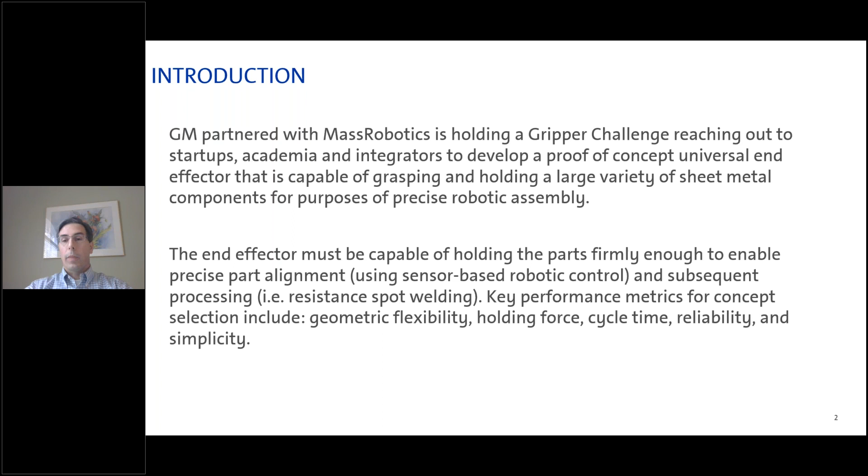So we're trying to develop a proof of concept universal end effector. The larger the variety of components that the end effector can handle, the better. It must be capable of holding parts firmly enough to enable precise part positioning and alignment, as well as processing—which in our body shops typically means resistance spot welding, but can also mean placement of adhesives or other sealant materials. The key metrics we're looking for include flexibility, holding force, cycle time, the time it takes to reconfigure the end effector, reliability, simplicity, and cost.

I want to show you—many of you are familiar with automotive manufacturing to a certain degree—but since I can't walk you through a plant, I wanted to show you some videos virtually that give you a flavor of what it's like in a body shop environment. Hopefully this will work.

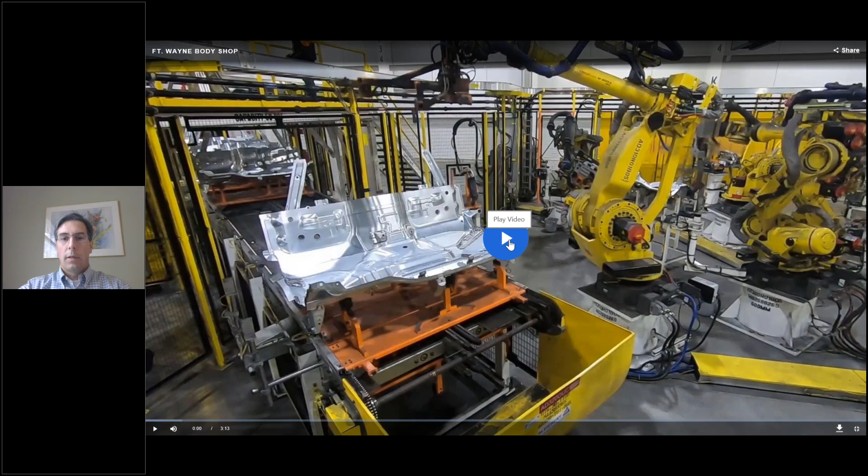These are videos that are publicly available on our media site. Russell or Fady, let me know if there's any trouble seeing this video image. I'm going to walk you through here. I can see the video, and I hope the rest of the participants can see it too. If you have any problem, just send us a message in the chat box.

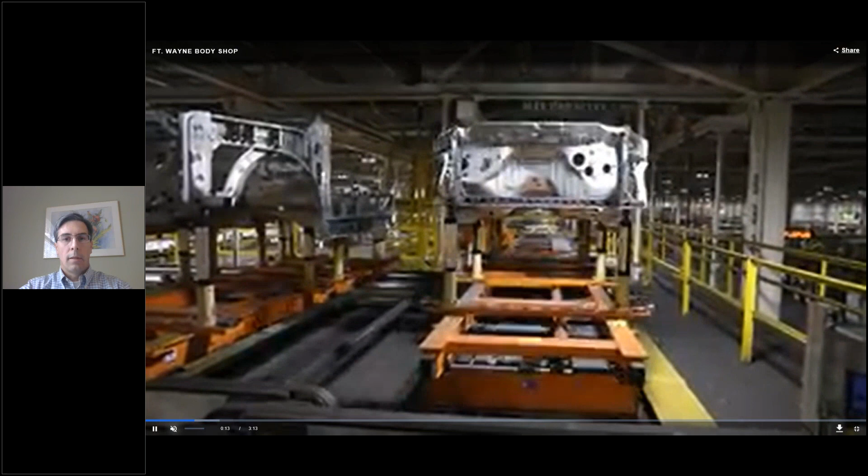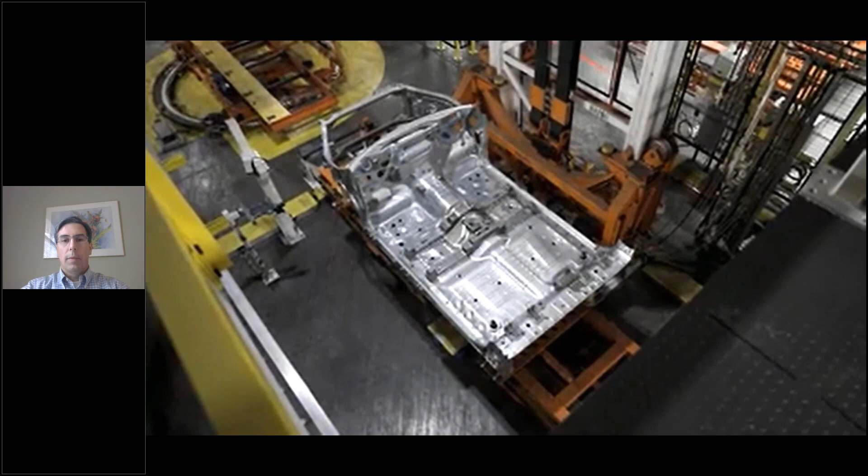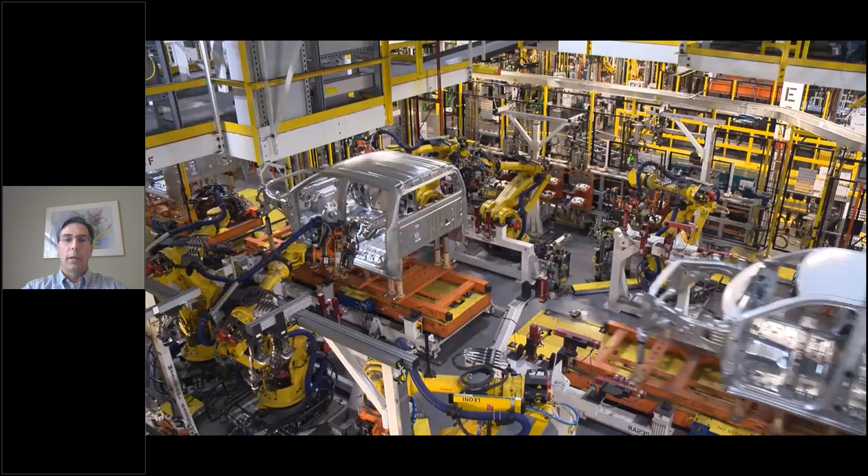So this is what it looks like in one of our body shops. This is for our Fort Wayne truck assembly plant, and this is where we're producing the sheet metal body structure of the truck. You can see it in a certain stage of buildup—it's not complete at this stage. This would be a sub-assembly cell, and you can see the sparks flying—that's expulsion from resistance spot welding. Parts are being held together in fixtures while they're being welded with resistance spot welding, and you can see various robots working to either do welding or move parts around to different positions, placing them into fixtures or holding them against the vehicle.

You can see that this is a harsher environment to be in than your typical warehousing operation, especially since hot metal can be destructive to certain materials, especially materials that are flammable.

If I back up quickly here, you can see a typical end effector in orange at the end of this yellow FANUC robot that's holding a larger sheet metal component. That's typically how we build them—it's dedicated to a single style, and it's a steel structure made out of steel tube.

When we're done producing this particular style of component, we'll need to throw away this end effector and buy a new one. That means designing a new one, building a new one, trying it out, and making sure that it works. This is something we do for every single robot end effector, and times hundreds of robots in a body shop in a plant. We would like to be able to do that with a flexible solution so that we can reuse our capital over a larger number of parts.

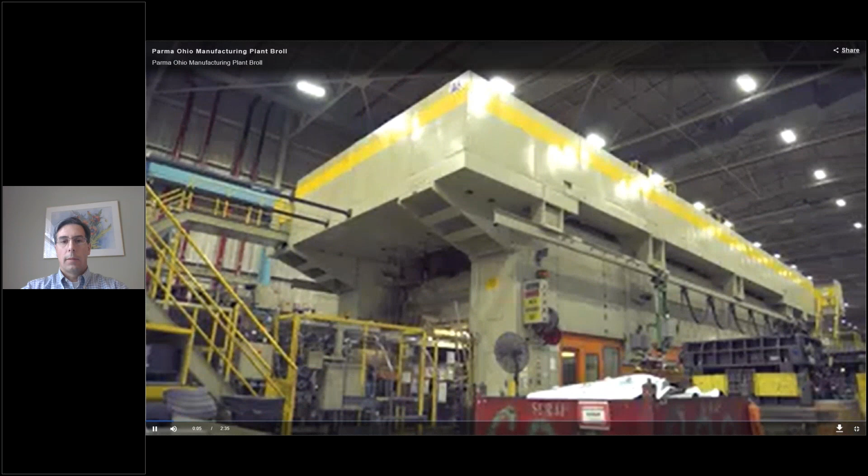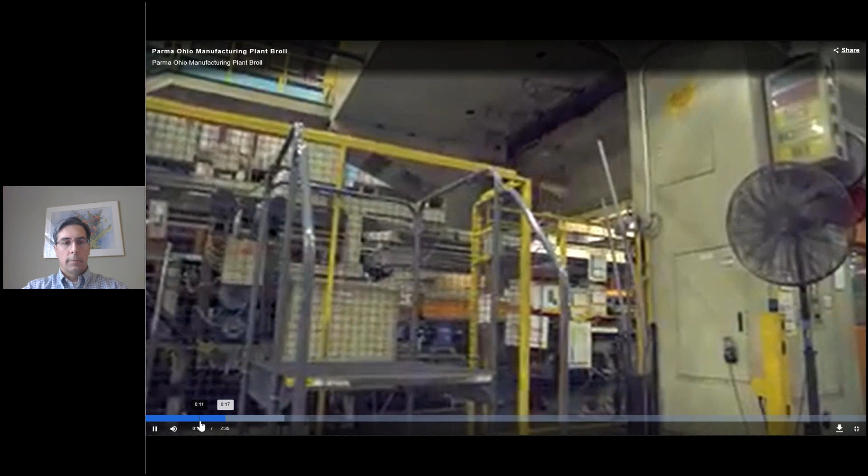You can think that the end effector will see three different types of loads. One is the part in a static condition, just holding the part. The other is dynamic, when you're moving the part from point A to point B. And the third is where at point B you might be pressing the parts against each other or against the fixture, applying a certain force. The worst case scenario for this challenge out of those three would be 25 pounds, as you mentioned, Russell.

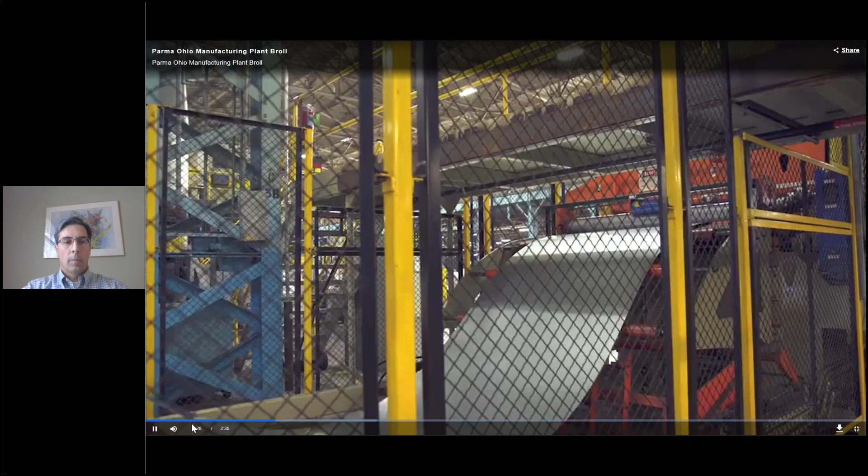All right, so we have another question. I know this is probably a tough one, but broadly, what are the typical dimensions of the end effectors that you're looking for?

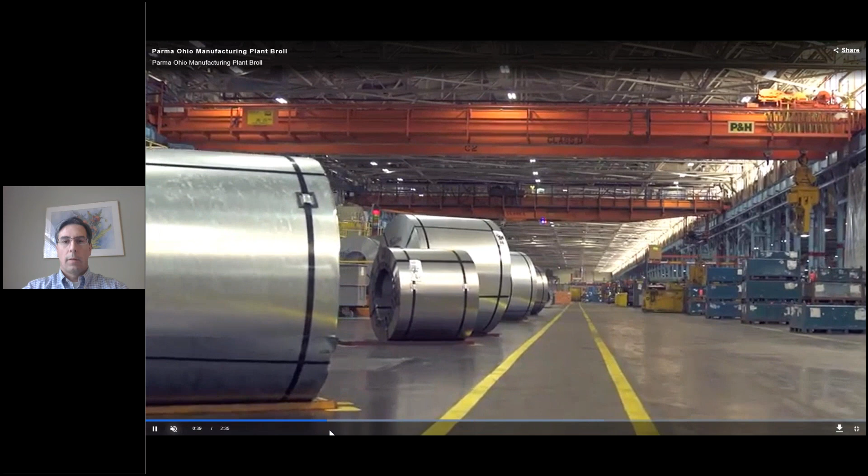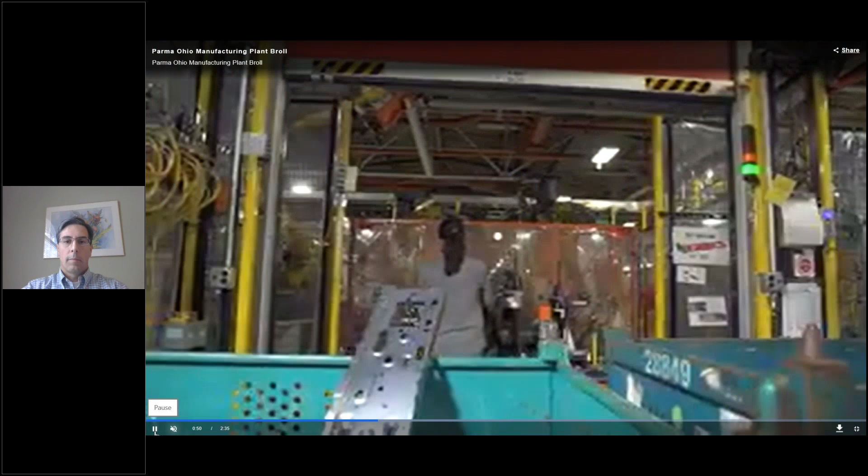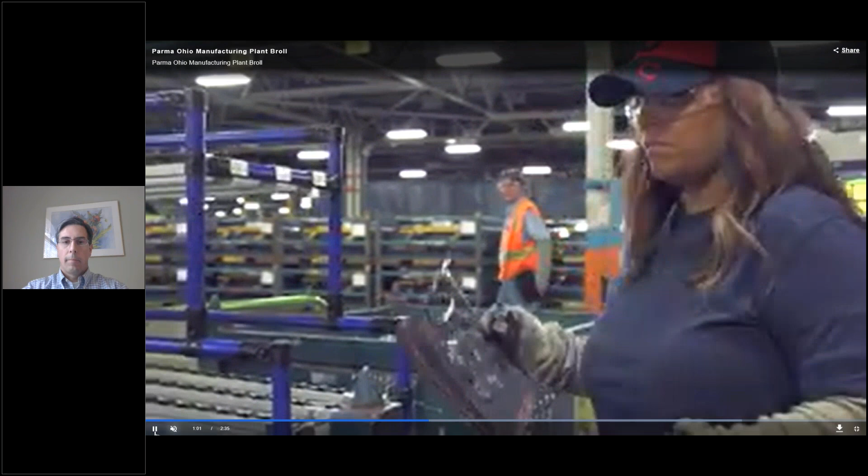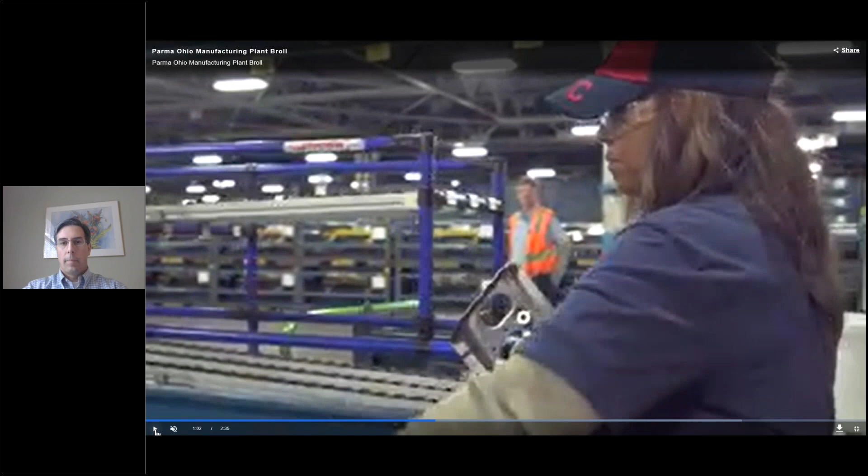So for the reference parts that we will be using, you can imagine that they all fit in a shoebox, or shoebox-sized brackets, if you wish. Some are smaller, kind of like the ones this lady is holding in her hand. So we don't necessarily want to constrain the solution for the size of the end effector. However, we will be evaluating simplicity, and that could be tied to the packaging of the solution. So I don't think that directly answers the question of whether we have a constraint on the size of the end effector.

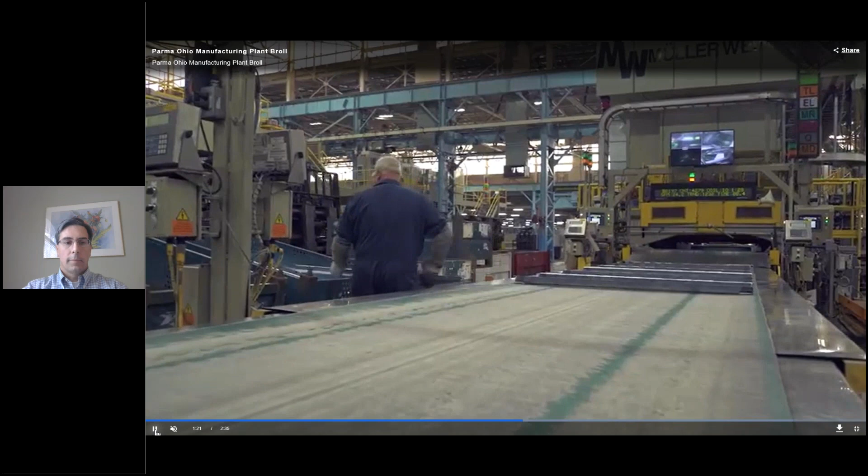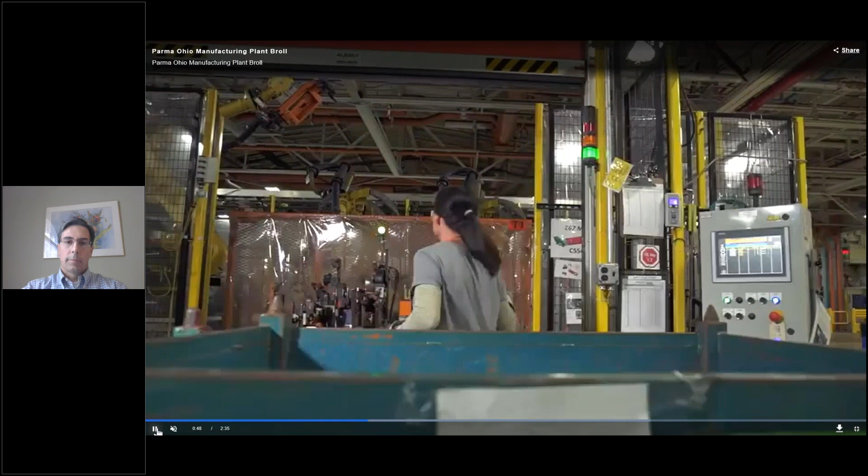So no, there's no limit, but we are considering that an end effector with better packaging and a leaner solution will get a higher score. As a reference, the parts that will be handled by the end effector can fit in a shoebox—they're about 30 to 35 centimeters long. Something on the order of the size of this part is our greatest interest right now.

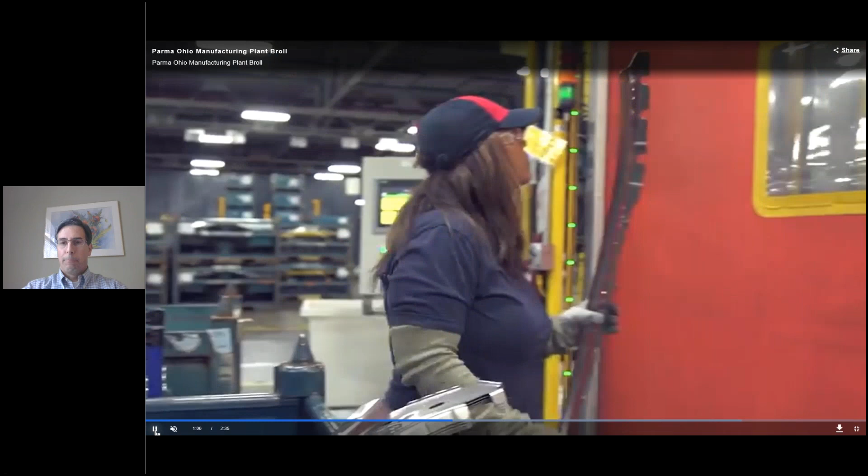We have, basically, a larger variety of these smaller components than we do the larger panels. Although if we had a solution that would handle the larger and smaller components at the same time, that would be great.

And one of my questions really quick too: are you guys interested in a scaled approach, in which maybe someone comes up with a gripper that is essentially the same design, but just a different scaling, bigger to small? Yeah, that's a great point, Russell.

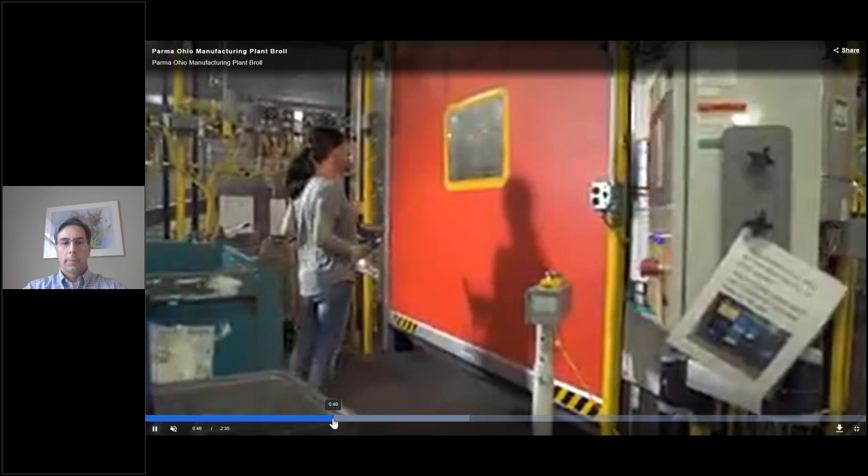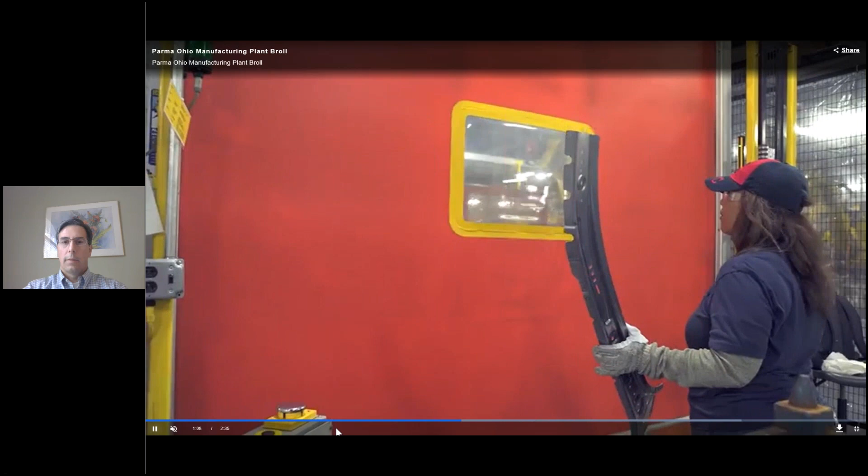And I think that the answer is yes. I think that more than the specific design for holding parts A, B, and C, what we would be evaluating is how the parts are being held, and can that same gripping strategy be scaled up or done at a larger scale. So if all it is, is take the same solution and put it on a bigger frame, and now you can handle bigger parts, that would definitely be an advantage.

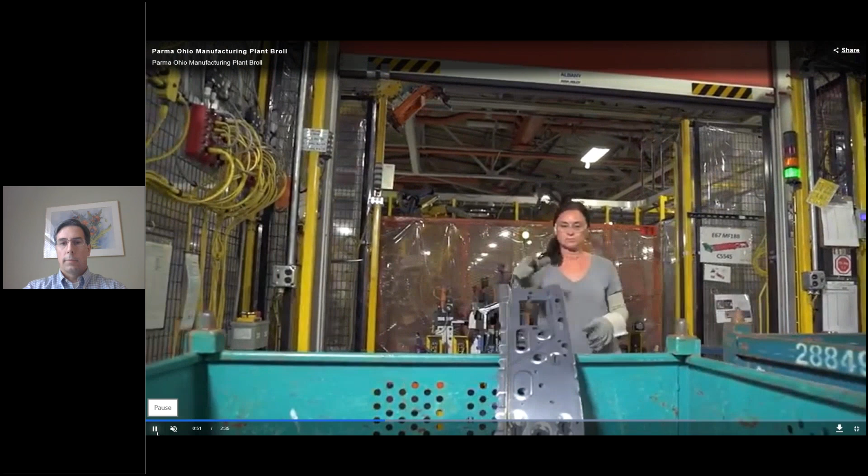Excellent, excellent. We have a few more questions too. We got a bunch. There's one: are there defined zero points for each part, and what are the tolerances for the parts?

So there are no, so the parts, I don't know if this answers the question in terms of zero for the parts. Usually in automotive applications, the typical holding strategy is a two-way and a four-way locating strategy, that is a pin and a slot. However, you could have a part with 2 pins, or you could have a part that's blind. So again, flexibility will dictate, and will be a major driver for how the parts are being held. So in that regard, there is no zero point on the parts that we have to maintain. We have to be able to assure that the parts don't move once held by the end effector. But the relative position of the part with respect to the end effector could change from design to design, from part to part, right? So I don't know if that answers the question.

Yeah. Okay, well maybe I could add to that a little bit, Miguel, as well. In general we do add features to our parts that help us locate parts into fixtures. Like you can see here, these parts are being placed onto a fixture, and they're typically being placed over some pins that go through some holes in the part to make sure the part is positioned properly. And then there are certain surfaces on the parts that we have details in the fixtures that touch against, to make sure that part is held in a certain orientation on a certain plane. So many of these parts will have these features in them.

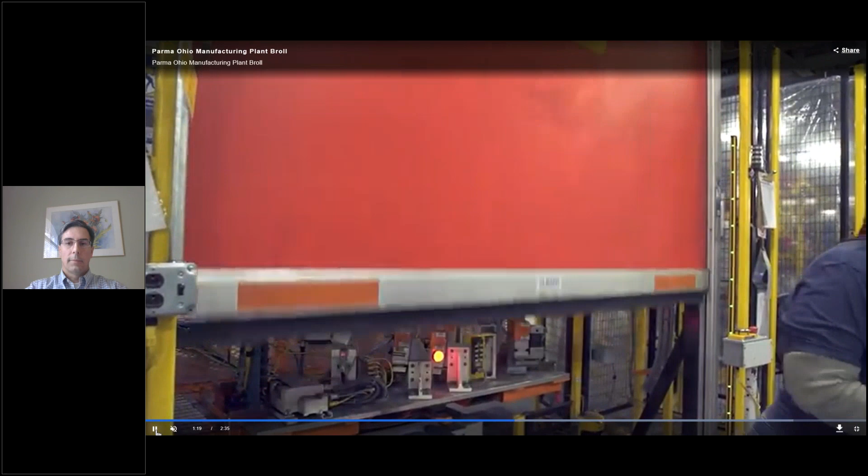So the parts will not have to be picked up from any bins. Right now, so correct me here, Pat, if I'm wrong, but the parts will be presented to the end effector on some sort of presentation nest that will put the part in, like, a single part in the right orientation. If a solution that can handle random bin picking of the part is presented, that would definitely be a plus. Yeah, I think that's probably a good way to answer it.

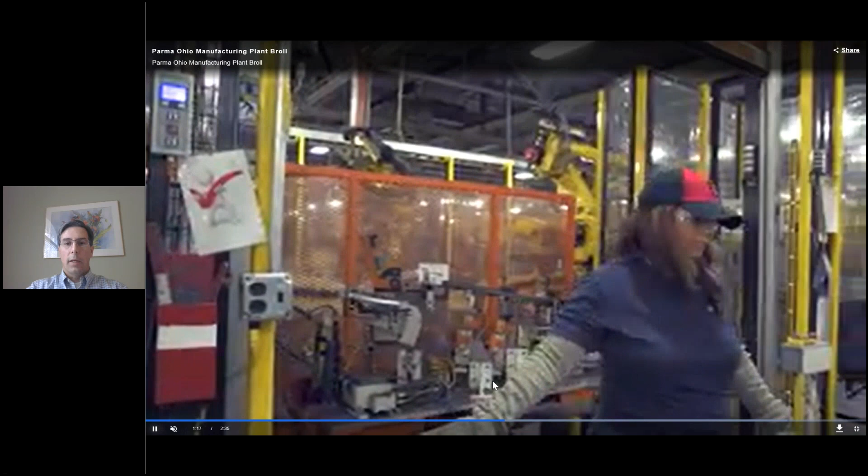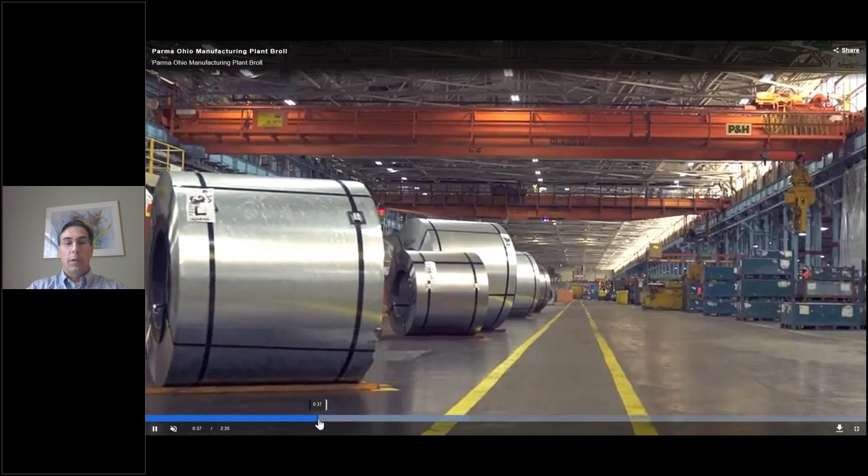To get to the robot, the parts need to come from these shipping containers usually, and so oftentimes, as you see here in the video, we have a person that transfers it from the shipping container to a fixture or to a position where a robot can pick from. But yeah, solutions that can do that picking from a container for us, and even if the part is in a randomized positioning in the container, those would definitely be ones that we would look at more favorably.

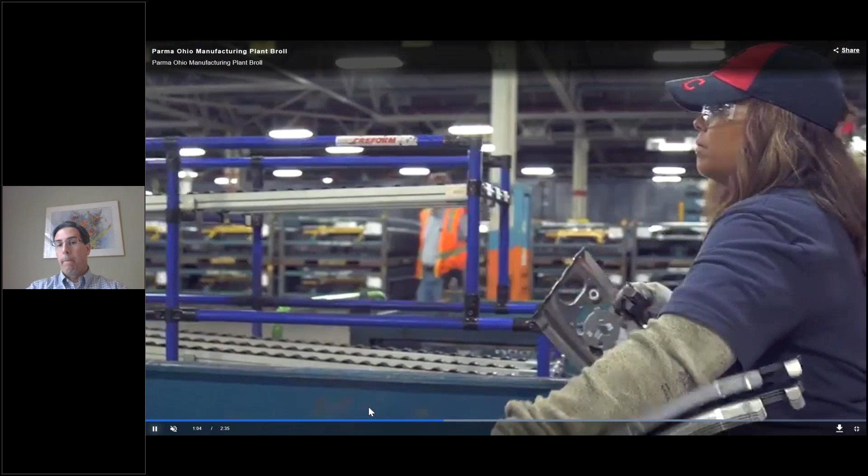Okay. And so I think there's another question. Just briefly, can you touch on why magnets are not preferred?

Well, maybe Miguel, you want to talk to that? I think, yeah, I don't know that we want to exclude magnets, but you can maybe talk to the specific challenges around them. Yeah, sure.

As I mentioned before, two main issues with magnets is that they could magnetize a part, and then the part would attract some of the particles, expulsions, for example, from the welding operation, which, as the vehicle goes to paint, get painted over.

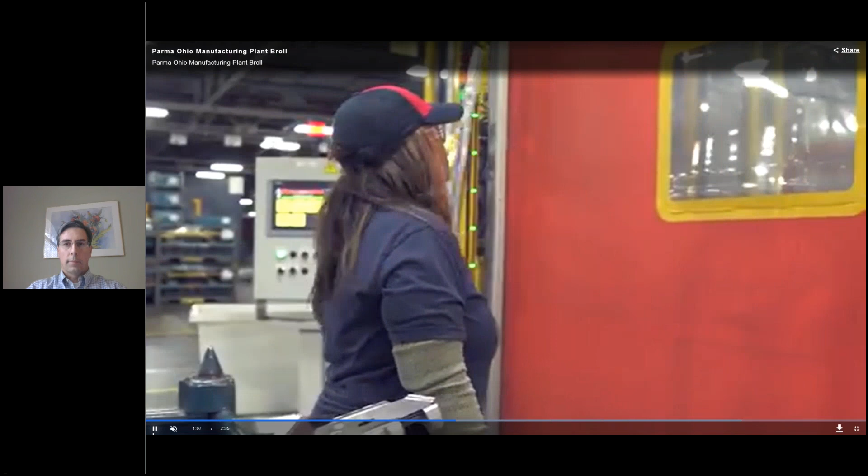So that is a quality defect if the part has a lot of expulsions embedded into them. Also, these comments come from experience, that the magnets end up, either the part attracts the particles or the magnet itself attracts the particles, and then it's possible that you start building up material on the magnet surface, and that affects the performance of the magnet, like the holding force, or they end up scratching the surface of the part.

So that is on the part side, and then the other aspect is flexibility. If a solution only relies on magnets, then the effector can only hold ferrous materials like steel, and with the current pursuit of lighter structures in vehicles, we're starting to use more and more aluminum, or even carbon fiber, but for the most part aluminum in our bodies. So not relying on magnets would be an additional point for flexibility.

Okay. So we got a bunch more questions we gotta run through.

Another question is, is there a minimum or maximum number of gripper elements? For example, one to three touch points working together?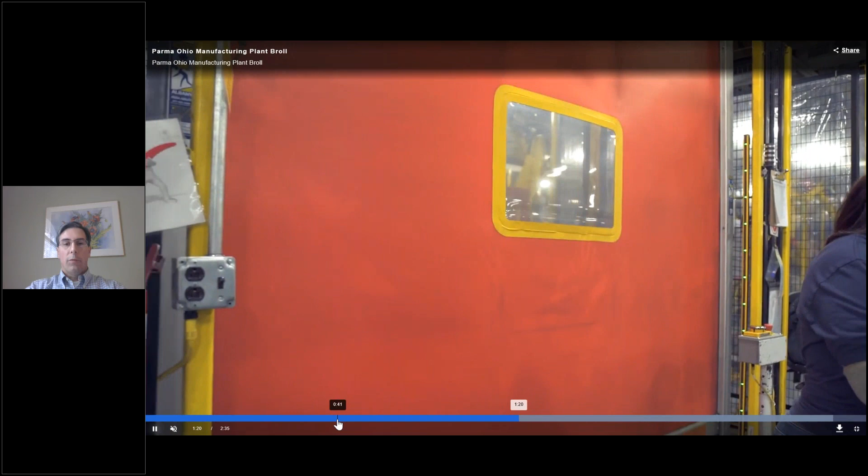I don't think we'd have a maximum or a minimum. We want to be able to constrain the part in space and do that in a flexible way. We want to avoid too much complexity because these have to run for years. We don't want them to break down easily. We want them to be easily maintained, and we don't want them to be too costly. Although if they're flexible and can be reused, we can afford maybe a little more cost than we could for a dedicated end effector.

Okay, let's see, we have another question. I'm not sure if this means... so they're asking about the IP protection level of the robots, so perhaps what level of security would need to be maintained working on this system.

IP protection of the robots. So, I'm not sure I understand the question completely. I think that the participant will maintain their IP in the end effector if it's their design. The rest of the components that we're using in our system for automation are off-the-shelf components. So whatever background IP, if you wish, that either GM or the participants bring to the table will be their IP.

So I would think that question could have two answers. In terms of actuation, it's permitted — you could think that you can move a holding fixture with a motor, a servo, or a mechanism, or even a pneumatic solution and a mechanism.

In terms of how long it takes to change from one model to the next, we don't have a specific requirement. However, as Pat said, cycle time would be one of the evaluation criteria. As a reference, right now, if we were to change the end effector from holding one part to holding another part, you can see from the video that if you could do that reconfiguration in the air while holding part A and now holding part B, that usually takes a few seconds, so probably 10 seconds or less.

Okay. Right. Mm-hmm.

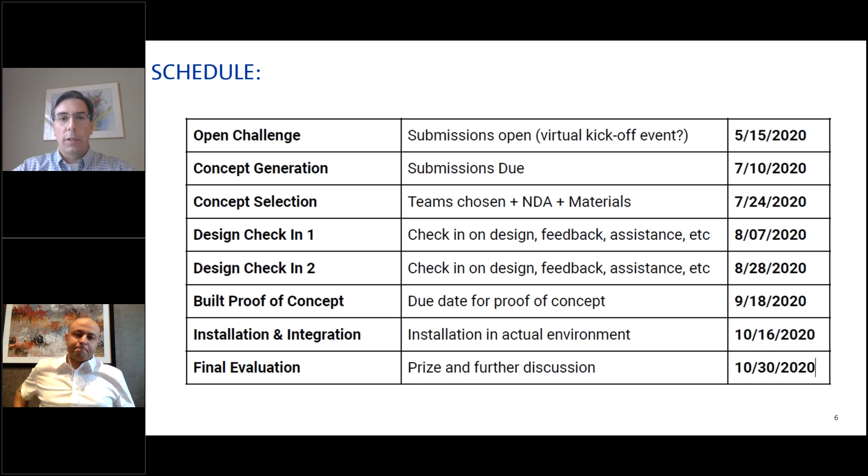No, we just got a list of links, and we'll also provide some additional references for folks to take a look at, with examples of sheet metal components that they can look at. But that would be, I think, following the call today.